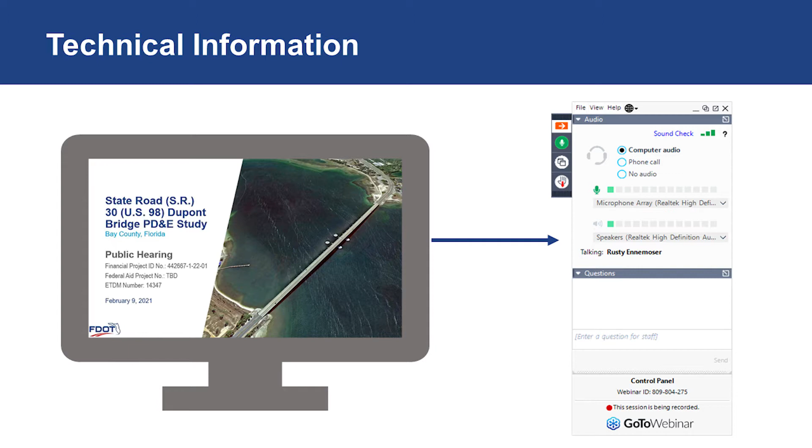If you prefer to listen by phone, select Phone Call in the audio pane of the control panel and dial in using the information displayed. All virtual and phone-in attendees will be placed in listen-only mode throughout the public hearing.

At a later date, we will provide responses to written comments that were submitted during online registration and those submitted at the in-person venue. The comment period begins as soon as the presentation has ended. Verbal comments from the in-person meeting will be addressed first. Verbal comment requests submitted during online registration will be addressed second.

Providing verbal comments using GoToWebinar is simple. First, you must request to speak when registering to attend. During the comment period, the organizer will call your name that you provided at registration and unmute you.

If the microphone icon is green, you are ready to make your comment. If the microphone icon is orange, you will need to click the microphone icon once and it will notify you that you are unmuted, and then you can provide your comment. Again, you will not be on camera at any time if you join online.

During the public comment period after the formal presentation, in-person participants will be called upon to speak first, followed by the virtual online speakers who wish to speak. If you dialed into the public hearing by telephone, your phone was automatically placed in listen-only mode and will remain in listen-only mode throughout the public hearing.

A recording of the webinar will be available at the project website 3 days after the hearing. You can also call the project manager after the public hearing to request additional project information.

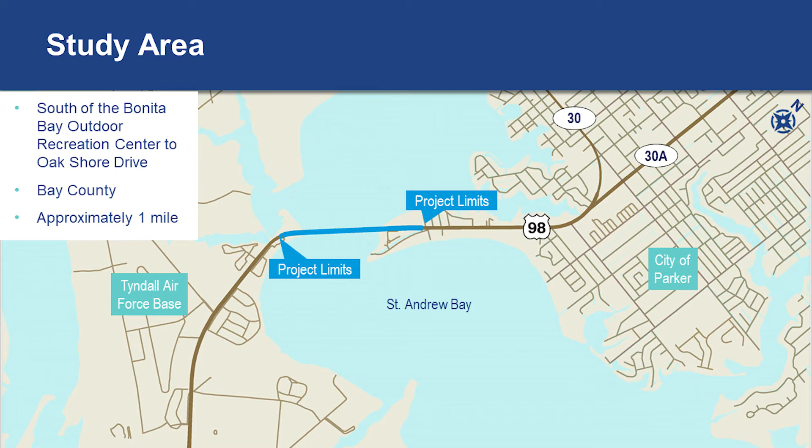The study limits extend from south of the Bonita Bay Outdoor Recreation Center to Oak Shore Drive, a distance of approximately 1 mile. The southern approach is located on Tyndall Air Force Base, and the northern approach is located within the city of Parker.

The project purpose is to identify the best solution and location for the replacement of the existing Dupont Bridge and to secure the necessary environmental and regulatory approvals.

The project is needed because the existing bridge is structurally deficient. It is also functionally obsolete, which means it does not meet current design standards. The existing bridge has a vertical clearance of 50 feet, but the current U.S. Coast Guard requires a minimum clearance of 65 feet. The existing bridge is also not ADA compliant and does not provide appropriate pedestrian and bicycle accommodations.

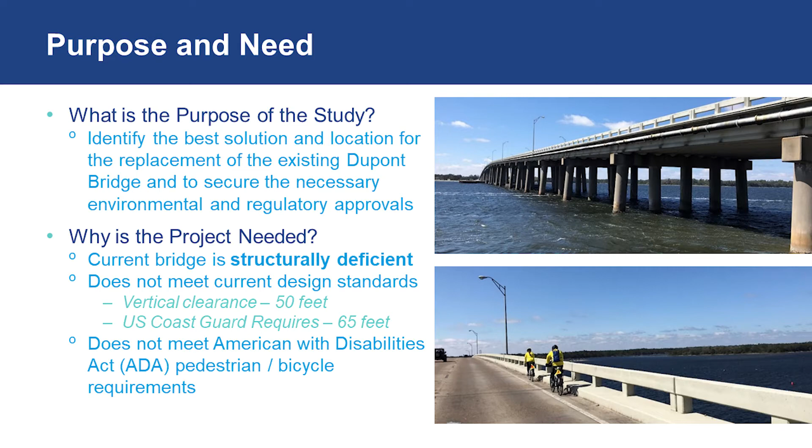The project is consistent with local transportation plans, including the Bay County Transportation Planning Organization 2040 Long Range Transportation Plan, the Transportation Improvement Program, or TIP, the State TIP, or STIP, and other regional plans.

3 build alternatives and a no-build alternative were evaluated as part of this PD&E study to meet the project purpose and need, as well as minimize impacts to the natural and built environment within the study area. The no-build alternative assumes no improvements are made and does not meet the purpose and need for the project. However, it does provide a baseline condition against which to compare and measure the effects of the build alternatives.

A detailed comparison of the build alternatives is provided in the preliminary engineering report and the environmental document.

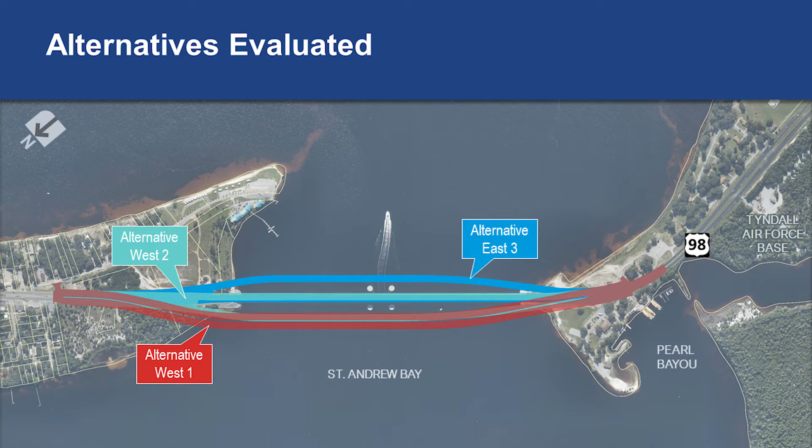Alternative West 1 places twin bridges west of the existing Dupont Bridge, which simplifies construction and avoids the 1920s bridge footprint and the current Dupont Bridge footprint.

Alternative West 2 places one of the twin bridges west of the existing Dupont Bridge. Temporarily, all traffic will be shifted to the new bridge while the existing bridge is demolished. Then, the second twin bridge will be constructed and traffic will open on both bridges. This alternative avoids the 1920s bridge footprint but will have pier conflicts with the current bridge.

Alternative East 3 constructs one of the twin bridges east of the existing Dupont Bridge, then shifts all traffic to the new bridge and demolishes and reconstructs the second twin bridge in place of the existing bridge. This alternative has conflicts with both the 1920s bridge and the current Dupont Bridge footprint.

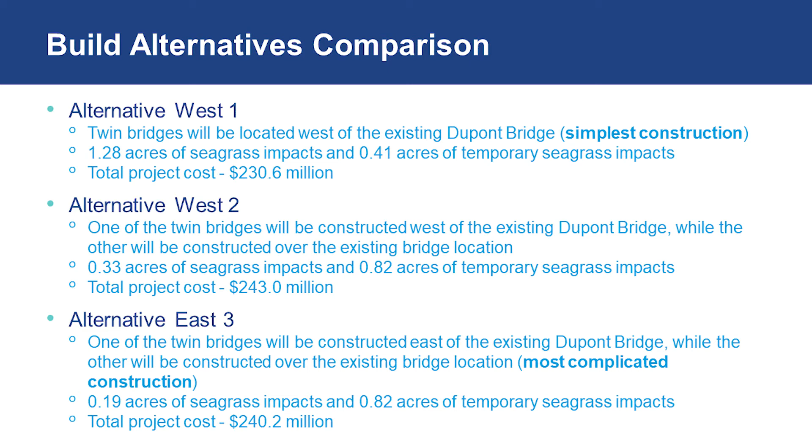With consideration of public input and an evaluation of engineering and environmental considerations, the preferred alternative is the West 1 alternative.

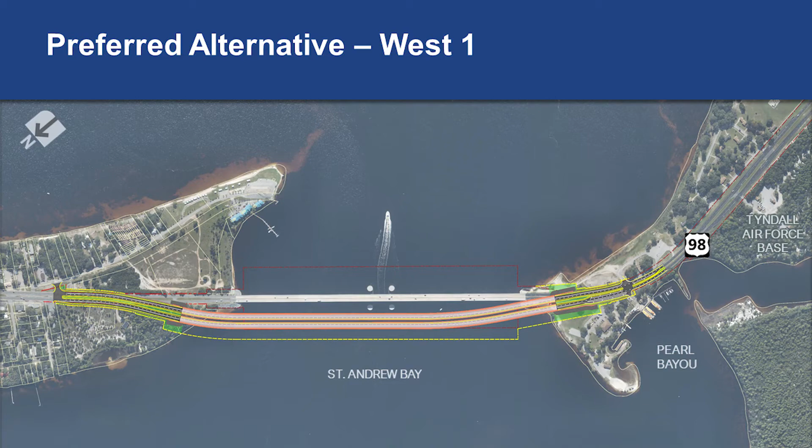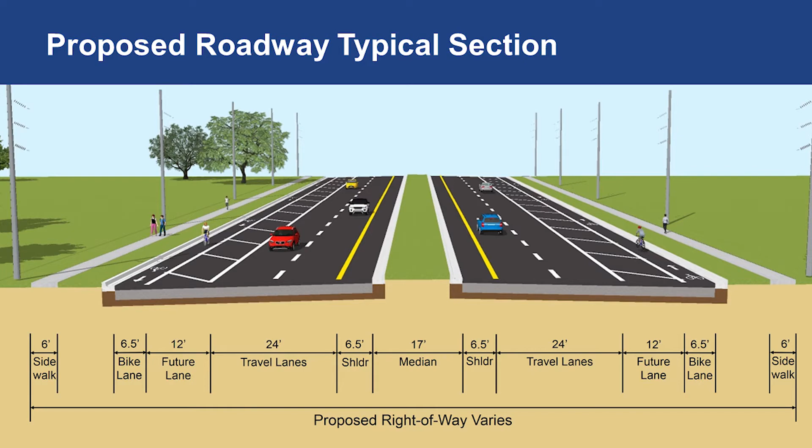The proposed roadway typical section provides 2 travel lanes in each direction with space to add a future lane. The travel lanes have a 30-foot separation, which includes 6.5-foot inside shoulders and a 17-foot median that includes curb and gutter. A 6.5-foot buffered bicycle lane is adjacent to each outside lane and is separated from the 6-foot sidewalk by curb and gutter and an 8-foot grass strip. The design speed of the proposed roadway typical section is 50 miles per hour.

The proposed bridge typical section features 2 structures, one for each travel direction. Each structure includes 2 lanes and 10-foot shoulders as well as room to accommodate a 3rd lane when traffic warrants. The proposed bridges are separated by 20 feet. A barrier wall separates the 6-foot sidewalk from the bridge shoulder. The design speed of the proposed bridge typical section is 50 miles per hour.

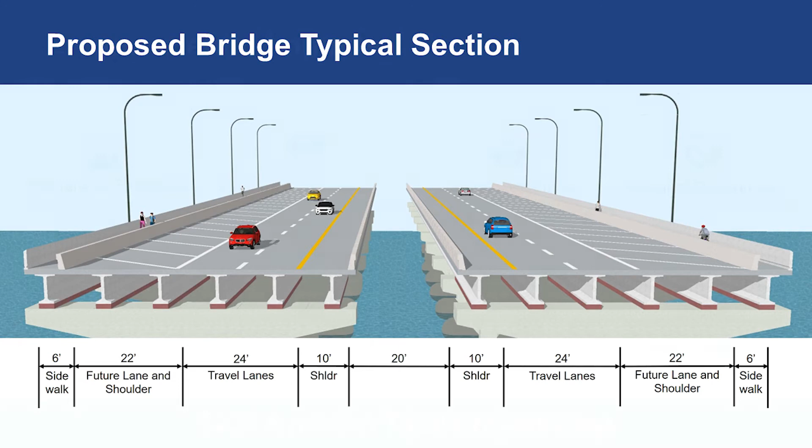The total cost for the preferred alternative is approximately $230.6 million and includes the cost for construction, right-of-way, engineering, construction, engineering and inspection, and wetland mitigation.

This project will not cause any relocation of families or businesses. All right-of-way acquisition will be conducted in accordance with Florida Statute 339, Section 9, and the Federal Uniform Relocation Assistance and Real Property Acquisition Policies Act of 1970, commonly known as the Uniform Act. The right-of-way specialists who are supervising this program are here tonight and will be happy to answer your questions.

Access management is used to determine the locations of driveway connections, median openings, and traffic signals to improve safety and traffic flow. Proposed access management modifications are on display tonight. The project will not affect the access management classification, Class 5. There are 2 median openings within the project limits located over 1 mile apart that meet the access management criteria.

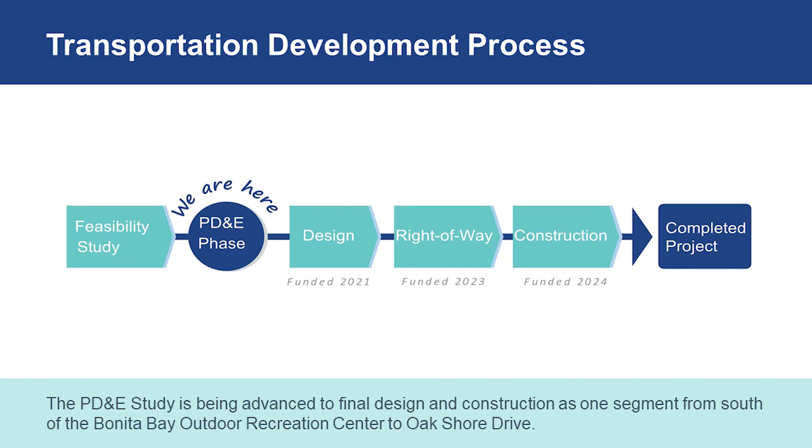The next step is to incorporate your input on this public hearing into our decision-making process. After the comment period closes and your input has been considered, a decision will be made and the final PD&E document will be sent to the FDOT Office of Environmental Management, which, based on the Memorandum of Understanding signed with the Federal Highway Administration on December 14, 2016, has approval authority on this project, granting location and design concept acceptance. Please note that we will not be responding to your comments and questions today, but we will respond in writing at a later date.